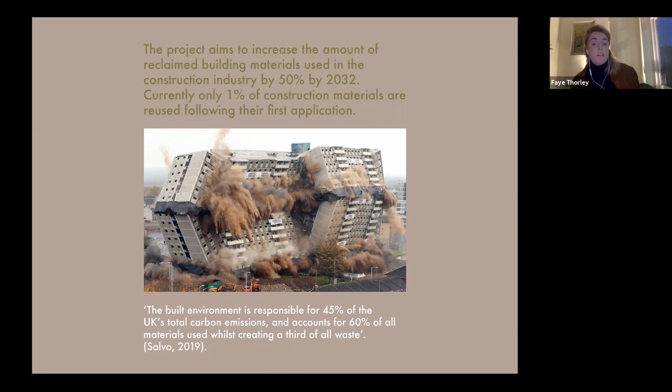We have been working with the likes of the GLA, the Greater London Authority, who have set the scope to work towards a 20% increase within their net zero targets. Just a small quote here from Salvo: the built environment is responsible for 45% of the UK's total carbon emissions and accounts for 60% of materials used, whilst creating a third of all waste. So very, very significant.

There has been a little bit of confusion around reuse and recycling, so just to define both areas: reuse refers to a practice of using existing construction materials rather than disposing of them as waste and using new products to replace them. Reuse is distinctive from recycling, where the latter involves physical or chemical operations to return materials to their raw material state, whereas the former keeps an existing element in the same state.

There are various deliverables under the FutuREuse project which a lot of architects will be able to tap into. There's an online directory that richly documents more than 1,500 specialised reclaim dealers across Europe. There's also a pre-demolition toolkit assisting clients who want to know how to deconstruct rather than demolish buildings, and reuse this material in new construction projects.

We're running 20 pilot projects across the UK, Northern France, and Belgium, where these tools will be promoted and tested on large construction sites. 4 out of the 20 projects will be based in the UK. We've also got the School of Deconstruction through the University of Brighton, which has had slight impacts due to the current climate with COVID. However, we are working around ways to digitise this construction and tap into educational institutes within the UK and across the northwest of Europe.

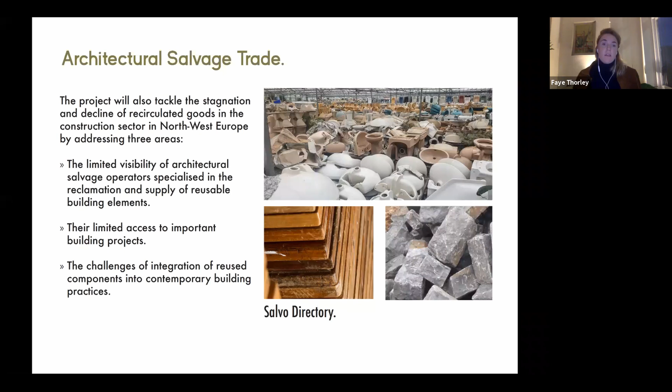So the salvage trade is a very vibrant trade, but it is generally overlooked by construction professionals as a really resourceful place for materials. And also trust between the architectural designers and developers, and the trade, just to get those lines of communication open and get them working in a more harmonious way.

The chain of actors which we generally focus on, as you'll probably be aware, includes the building owners and clients, the architects, the local authorities, the demolition companies, developers, and the reclamation dealers. These are all the chain of actors within this process, and it's really great for all these actors to communicate and work together to achieve quite significant or positive results in terms of reuse.

In terms of the pilot projects we're running, we're looking into various criteria. For example, it will benefit a private or public player, large or small, who would be willing to take up the subject but who would not necessarily have the skills or means to do so. There's a construction stakeholder who's interested in the subject but not sure how to go about it, and a project which is economically viable and repeatable, nothing too complex. Some stakeholders have been very ambitious in terms of what they're wanting to do, but we're sometimes trying to rein them in a little bit and say it's better to look at a more easier or viable option with reuse, just to make that more sustainable.

A project which introduces a variety of situations and must face a challenge regarding the extraction or integration of reclaimed products - the challenge can be related to administrative, organisational or technical matters. Some of our partners are very much looking into working with stakeholders through the procurement and tendering processes of their projects. We have other stakeholders who simply have that kind of reuse strategy in place, but they just don't know the platforms to access to get these building materials. We're also working with stakeholders in construction wishing to apply sustainable and circular principles to their business to reduce their carbon footprint, and they require professional support to fulfil this.

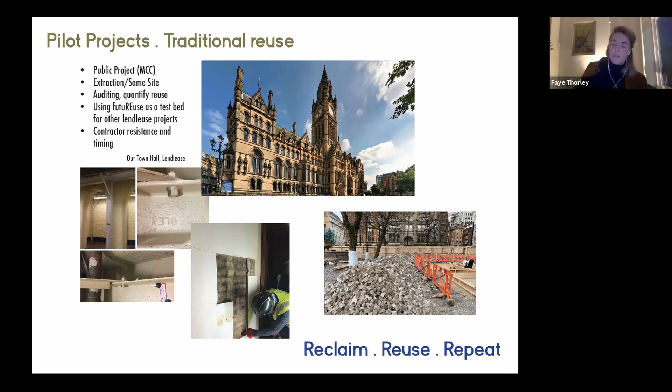Okay, so here are a few more examples of pilot projects that we're working on. These would probably be more relative to certain projects that the majority of architects are working on, in terms of new builds and the integration of building materials. With FutuREuse, we're looking at extraction as well as integration, and that's where we're testing the pilots and the tools developed to accommodate for these.

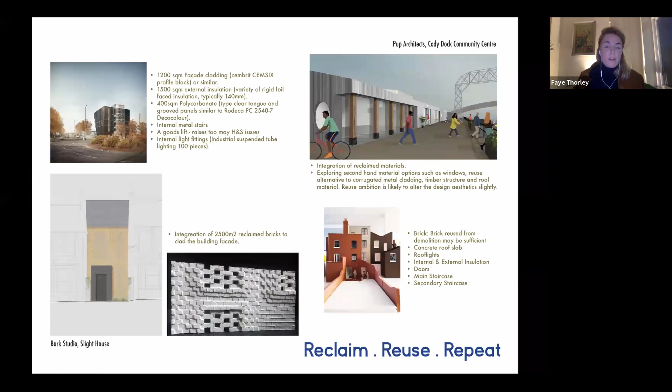And just on the bottom left-hand side, that's quite a simple reuse integration project, which is 2,500 metre squared of reclaimed bricks, just used for the exterior skin of the building — not necessarily a structural element, but just used as a windshield. That's actually going through now with Slight House, and that's with Bark Studio.

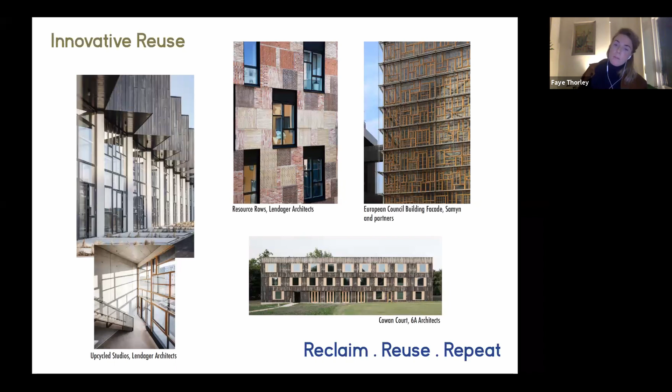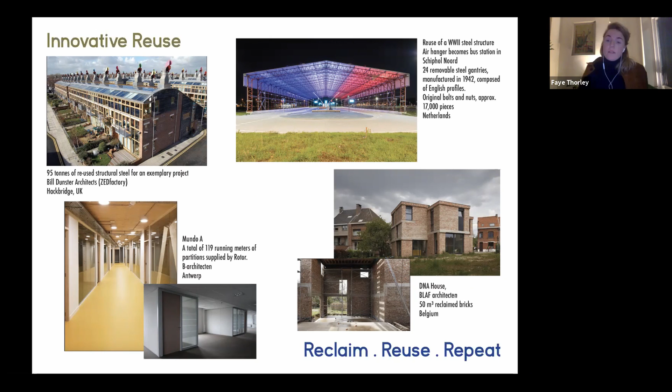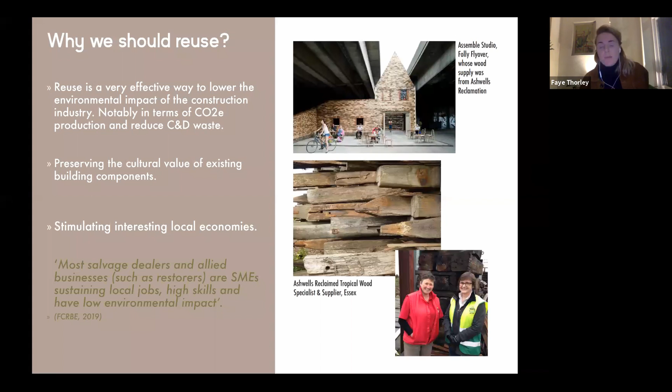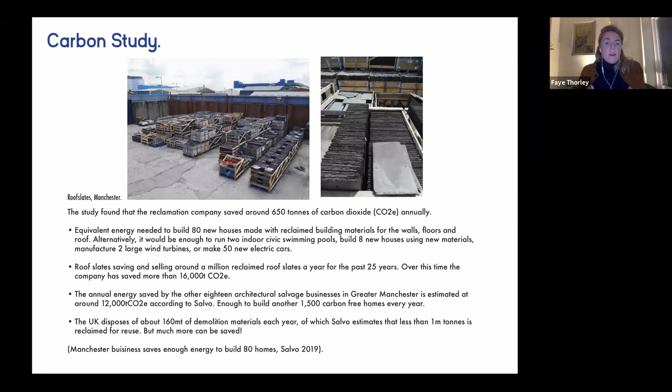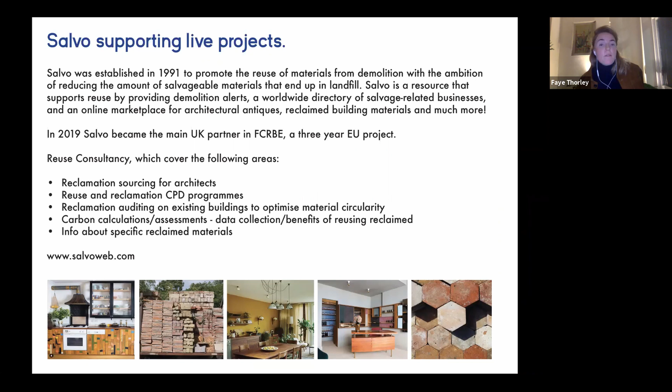We also became the UK partner in the FCRBE project, which is the 3 year project we've just been discussing. In terms of the reuse consultancy we offer, that's around reclamation sourcing for architects, reuse and reclamation CPD programs, reclamation auditing on existing buildings to optimise material circularity. We're looking at carbon calculations and assessments, data collection and the benefits of using reclaimed materials, and also info about specific reclaimed materials.

So looking at the common barriers of reuse, there's generally a lack of education around reclaimed building materials. So we have been working with the likes of the Sheffield School of Architecture to run certain sessions with their students to try and get them to think more circularly in terms of materials.

Obviously, the architecture industry is risk-averse, and that can be quite challenging sometimes when we're discussing material warranties and legislation, and whether these materials are safe to implement into your projects. That obviously goes on to the need for material warranties.

We've been looking at how we can design less homogeneous. Rotor are quite good at this, as well as another company in the UK called Vitruvius, an architectural design company down in London, who are paired with a reclamation dealer. They generally look at projects where if you only have around 50 square metres of a certain wood but need 70, you can look to match or complement that wood with maybe a nice stone, rather than having that homogeneous design throughout your designs.

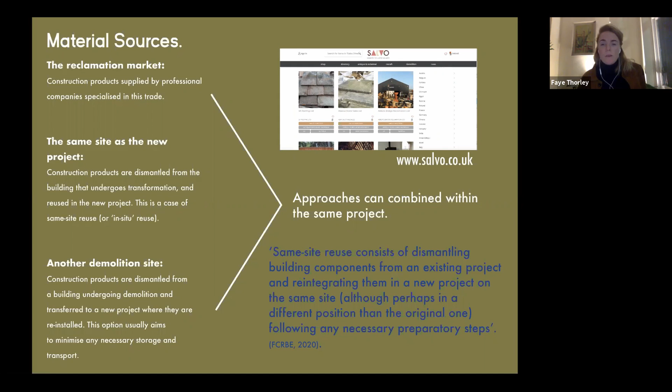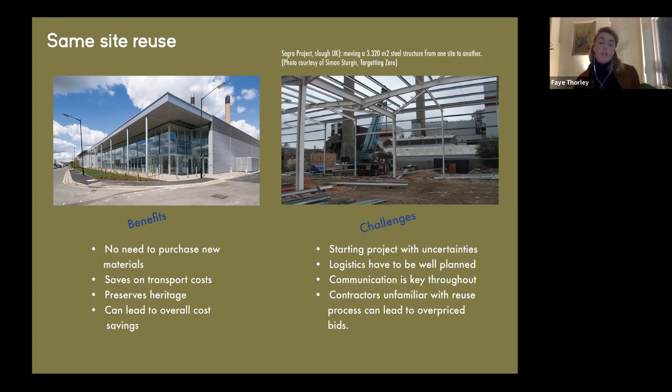Site-to-site reuse: demolition works on one site can foster the development of a project on another site. This is generally when a stakeholder manages large property portfolios. Building owners can foster the exchange of materials between sites in their possession. The architect or associated expert can scout opportunities in local, ongoing, or soon-to-begin demolition works. The contractor also has access to many opportunities via other construction or demolition sites, their own networks, or their warehouse of reclaimed products. The benefits and challenges of this approach are similar to same site reuse.

It relies on a coincidental match between supply - a batch of material becoming free on a certain site - and demand, a different project in which that material can be reused. The window of opportunity is often very small, from a few days to a few weeks, requiring quite rapid reaction times.

Specifiers involved in the project development need to carefully plan the logistics of this operation, looking at short-term storage and transport. It's always recommended to have reclamation specialists involved in such an operation to check product suitability and correct delivery conditions.

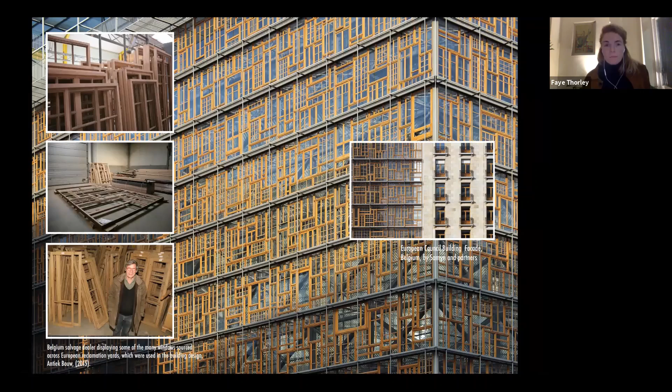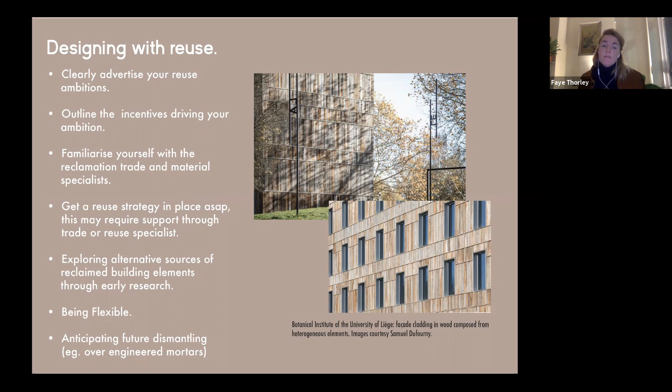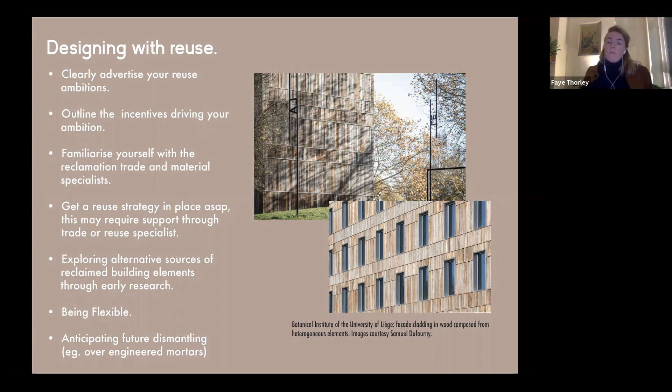So, designing with reuse: clearly advertise your reuse ambitions. Outline the incentives driving your ambition. Familiarise yourself with the reclamation trade and material specialists who can support these processes. Get a reuse strategy in place as soon as possible, as this may require support through the trade or a reuse specialist. Explore alternative sources of reclaimed building elements through early research. Being flexible is really important, as is anticipating future dismantling—future-proofing those materials and making sure you're not using, for example, very over-engineered mortars, which just reduces the reuse capacity of that material.

Recommendations to tenderers on proposing reuse: when working with the authority, it's important to highlight the positive impacts of integrating reclaimed materials, propose to retain and refurbish existing built structures, assess the reuse potential of materials present in the existing building, propose to integrate reclaimed materials in the new project, and point out to the commissioners what kinds of support and funds are available if they engage in circular strategies.

When working with the client, you generally find that, as I said before, more successful projects are very much client-led—the client has a strong reuse strategy in place or really wants to harness that within the project. If that's not the case, you need to show that you've planned backups and alternative solutions to mitigate the risk of not finding a reclaimed construction product that you propose.

Budget reuse strategies as precisely as possible, and don't forget to consider extra work that may be required, such as cleaning. Consider teaming up with experts, and we'd recommend doing that very early in the project to iron out all the creases prior, and to have a concise plan in place, developing scenario-based proposals to frame the range of possible outcomes. Projects whose clients advocate and drive reuse often accomplish their reuse ambition.

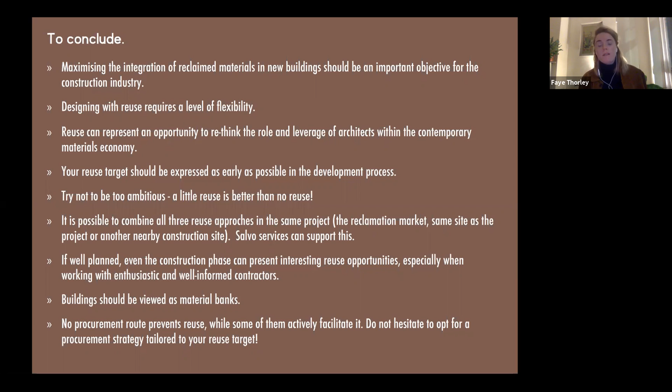And we've had a few questions, Faye. I don't think we're going to be able to get through all of them, but if we ask a few, then we'll see how we go.

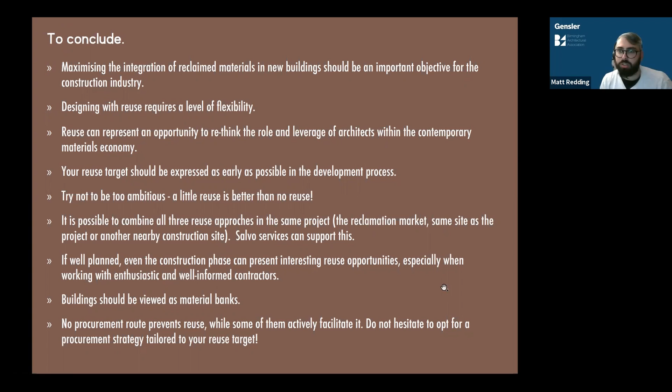One of the questions we had — you kind of mentioned it a bit at the end there — but when it comes to net zero carbon goals, what are the quick wins, and what are the potential blind spots?

I'm just going to stop sharing my screen for a second. No worries, there we go. Let's just see what we've got. You've come prepared. I have. Okie dokie, right, so yeah, you sent me through.

So in terms of quick wins — did you mean for the higher carbon value, or are you referring to the broader spectrum of reuse? For example, the broader spectrum.

First and foremost, we'd rather explore the possibility of not demolishing a building at all and refurbishing instead. However, if this isn't an option, we'd rather assess same-site reuse as an effective way to save carbon and reduce the transportation of materials. For stakeholders such as large-scale developers with multiple sites and greater storage capacity, they can treat these buildings as material banks, allowing for site synergy and greater capacity to track material flow and gather data on those materials. That's really important for material provenance, and it makes reintegration of materials much easier because the actors involved know the background of those materials and can be confident they're safe to use.